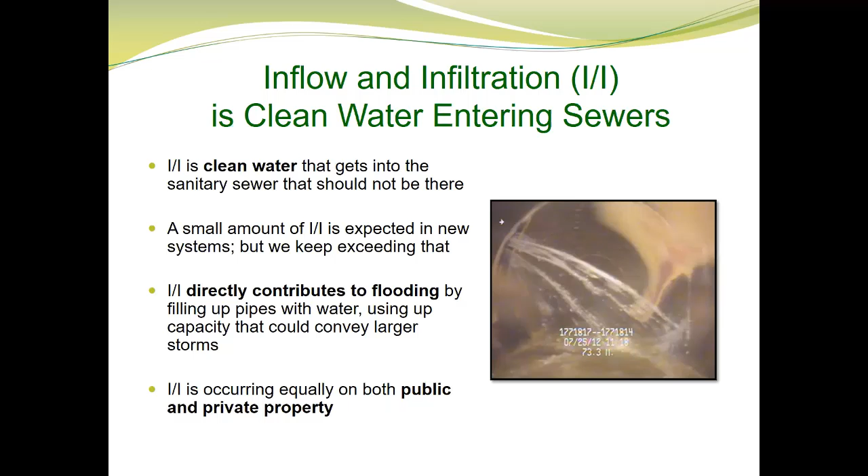And you'll hear many times during the webinar that I&I directly contributes to flooding, because the fuller the pipes are with water, the more likely additional water will cause a flooding event. Certainly, if it's a minor flooding event, it may be prevented by getting some of this clean water out or not allowing it to enter the sewers in the first place.

So we are doing a lot. ICLR and I are doing a lot. They're doing a lot more, but there's a lot of research that we're doing here. I'm not going to read these, but these are some of the things we're working on. I'm going to highlight the projects in red because we only have an hour, and I want to focus on things that you might be interested in. I'll mention the other ones, and certainly you can ask more questions. But yeah, there's a lot going on, and we're making lots of great progress.

So firstly, just to set the stage, no matter whether I'm talking about the public side or the private side, I'm just going to remind you what this looks like. So the public side of a sanitary sewer system is the street and the right-of-way. If you can see on this graphic, it's on the left. And it includes the main sewer that's typically underneath the middle of the roadway, and what we call the lateral or the sewer to the property line.

And then on the other side of the property line is another sewer lateral. It has a different name in the building code, but let's call it a sewer, and it goes to the house. This graphic is a little bit misleading because the sewer on the private side is actually made of different material than the one on the public side. It's much less, it's thinner walled. It's not as strong, and it doesn't last as long as the sewers we establish on the public side.

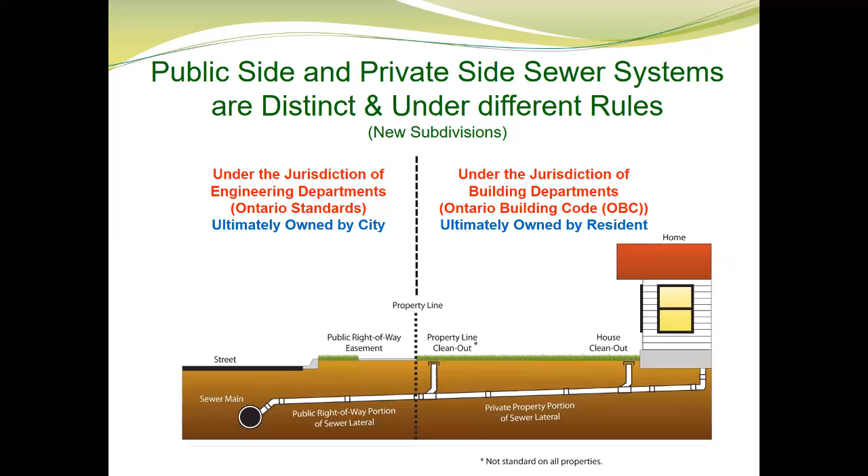And in engineering, as Dan said, I've been doing this for decades, thanks Dan. In engineering, we have mostly focused on the public side and not so much on the private side, but that's changing now because we're recognizing that the private side is a big contributor to clean water in sewer systems.

So, first project. I've been working on this, we discovered this issue in Woolwich Township like 13 years ago. In my career, I've been working in I&I my whole career, and we never thought that, we always assumed that brand new subdivisions would be not leaking at all. Like the flows would be very low and they would never be leaking, and we never flow monitored them.

But just accidentally in St. Jacobs, and this is public, so I'll use their name, I had a flow monitor downstream of a new subdivision, and after it came online, the flows in that flow monitor doubled, and the size of the subdivision did not warrant that much of an increase in flow. So we investigated, and we found a series of deficiencies in the subdivision. The contractor corrected them, and that was fine.

But subsequent to that, largely because Woolwich has had serious I&I problems at their wastewater treatment plants for years, I&I is a real problem for them. They decided to flow monitor all new subdivisions, and after that we flow monitored 3 more, and all 3 of those new subdivisions were also leaking. And they're all leaking for different reasons and in different ways, but they're leaking.

And by leaking, I mean there's more clean water getting into them than is reasonable to expect from a new sanitary sewer system. So when I started my company, Norton, 2.5 years ago, the first thing I thought was, you know what, I bet you if this is happening in Woolwich, it's happening across Ontario.

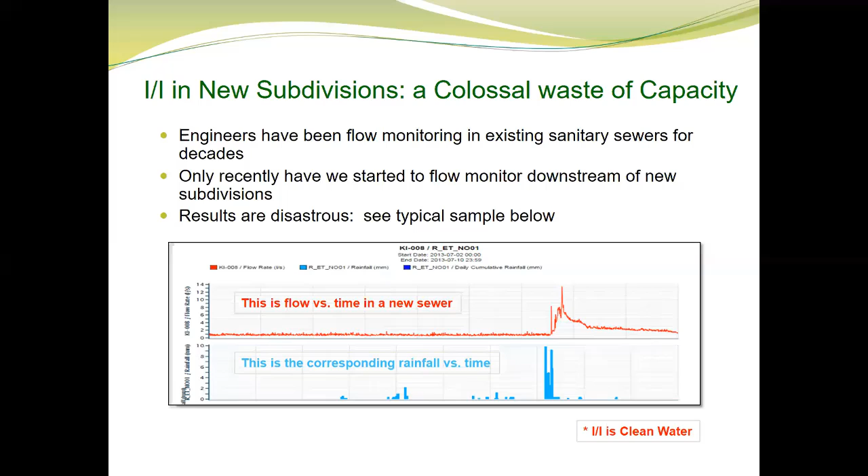And this base flow and that peak - the sewer was just built and it has a 75-year life. Those are going to be getting into the sewer for the next 75 years. And this is something we just can't afford to keep allowing.

So the first part of the project that I started with Norton Engineering was to actually just survey across Ontario: have you flow monitored any new subdivisions, and what have you found? It's not common to flow monitor new subdivisions, because I presume everybody else like me assumed that new subdivisions were not leaking, and we never really looked at them.

So I had 31 municipalities send me their data. The data is all blind, so I'm never sharing which municipalities said what or where or anything like that. And 94% of them self-reported that the new subdivision was leaking. So basically, almost all the subdivisions were reported as leaking, and that's as defined by the municipality, and I've done a lot of calculations on what the appropriate number is.

But anyway, let's just suffice to say, if you looked at the graphs, you'd see the kind of thing I see here, and even if you're not an engineer, you can tell that there's something wrong with the flows in that pipe. One municipality has advised that their new subdivision is not leaking, but I haven't received the data from them, so I can't really include it as not leaking unless I have the data. And I suspect they're using a different criteria for leaking than I am.

But anyway, so that's fine. There's some doubt about that one. And there's one single subdivision in the whole data set that's not leaking, and that happens to be in Woolwich. The reason that subdivision is not leaking is because developers working in Woolwich are now well aware that I flow monitor downstream of all the subdivisions, and a number of them have had letters of credit or money held back when we found the sewers leaking, and they know that that's going to happen again.

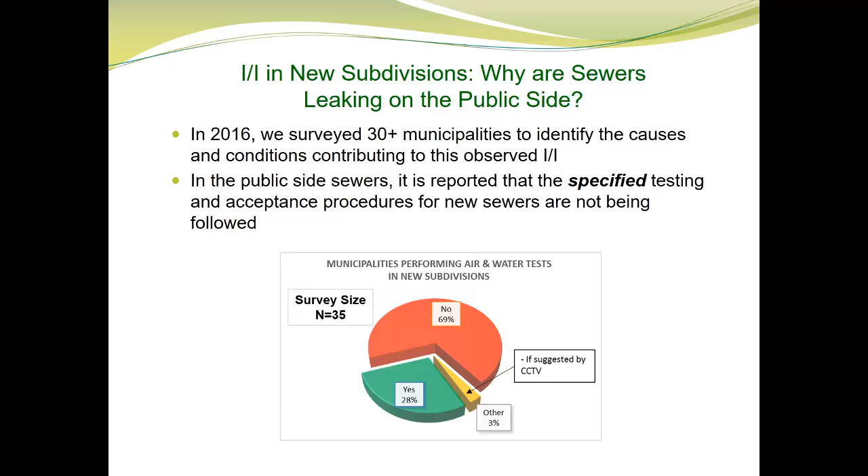Another issue that's quite common: those specifications we work under on the public side call for checking the gasket between pipes. When we lay pipes, whether concrete or PVC, you can imagine if we just shove those two pieces together there would be leakage there. So there's a gasket, like a rubber ring, between the sections, installed at each joint in the sewer.

It's a leaking joint. The specifications we work under actually call for each and every gasket to be checked once they lay the pipe, and that's not happening at all. I didn't hear any municipality tell me they were checking gaskets, or having the contractor check gaskets at each joint.

There's a practicality to that, because of how they lay pipes—they've got one pipe section laid in the trench, and typically these pipes are heavy, so an excavator or whatever puts chains on another piece of pipe and lowers it into the hole. Staff or contractors standing down there jimmy the new piece of pipe into the old one. Now they put the gasket around it. I've never seen them not put the gasket on, but it's a pretty delicate operation to get that new piece of pipe on without displacing the gasket.

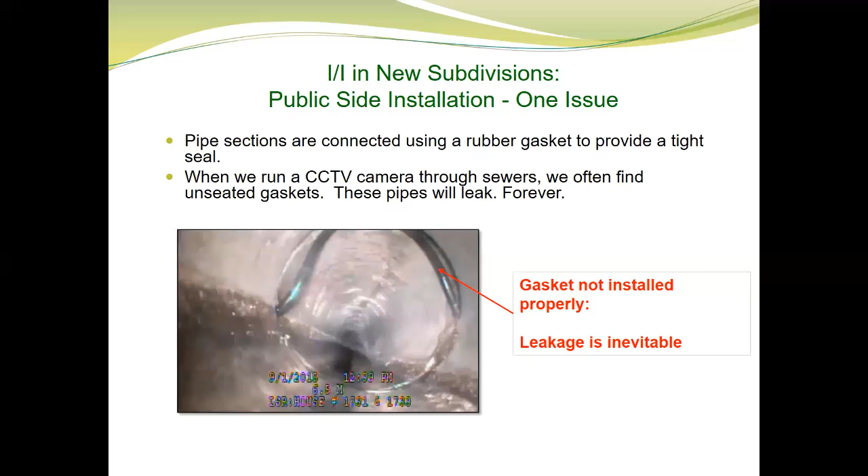However, this pipe is going to leak in perpetuity. And yeah, we found that a lot.

Okay, so moving over to the private side. The regime under which they work is slightly different—they work under the Ontario Building Code, and the requirements of the Ontario Building Code are regulation, as opposed to the guideline specification we work with on the public side. So it's actually more essential that these regulations are followed because it's law.

So I found similar results on the private side—we're all complicit in these issues. On the private side, they're also supposed to test the sewer from the house to the property line to make sure it's not leaking. 90% of building departments I spoke to advised that they were not testing the private side lateral. If we're not testing it, and leakage is happening, we'll never know. We could find out if we camera the lateral, but we typically don't unless there's a problem, and these laterals will leak forever.

So another issue on the private side: a pipe here is typically plastic, the stuff you see here. It's thin-walled, nowhere near as strong as the pipe on the public side. The joints are glued together as opposed to gasketed. With a gasketed joint, the rubber thing I showed you, there's a little bit of room for play—not a lot, but one pipe or the other could move a little bit.

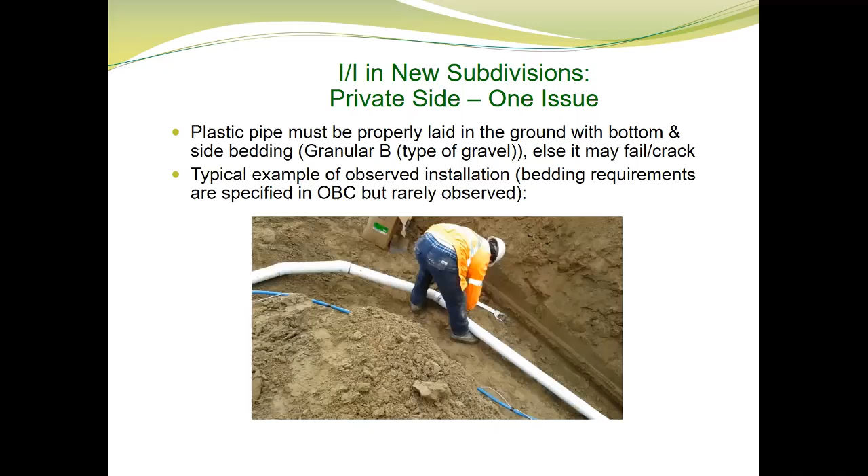And for the insurance folks, I'm sure you can imagine if there's more water in the lateral, the chances of flooding are going to be higher. And again, this is for life, because this is a brand new sewer.

The last thing I'll talk about, I've just picked out a few examples. We need to install, it's required, the engineering specifications require that we install a T at property line. The reason for that is for the building department to actually inspect the private side lateral, they need a way to plug it at the property line. So they can put in a temporary test T or whatever, and I suppose that will work as well, but we're actually required to put in a T. And to my knowledge, most municipalities in Ontario are not putting in T's anymore, even though it's called for in the specifications that they use for these projects.

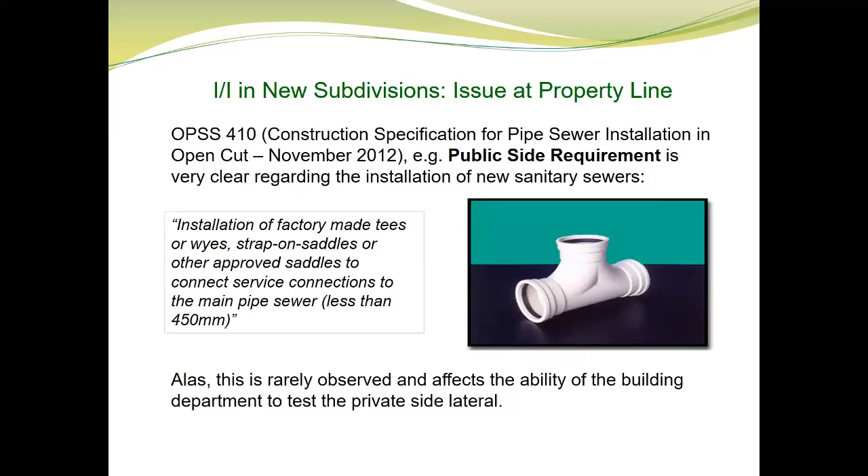Connection at property line - I mentioned that this is a place where we often see inflow and infiltration, and that's because, as I said, we dig it up and then we have to recompact. But when you compact differently on two sides of a connection, there's great opportunity for differential settlement. That leak you see there is in a brand new sewer at property line, and you can tell it's property line because the mainline pipe is green, and then you can see it's black - the black is the private side lateral. That leak is what we call a gusher, meaning there's some pressure behind it. If it was a seeper, it would sort of roll down the side of the pipe.

Based on my experience, that's probably half a liter a second. And if you remember what I said about 1 liter a second over 40 years having a present value of $1 million - if you can imagine these kind of gushers and weepers going on all over new subdivisions, that's a heck of a lot of money just in treatment. And I'm not even including the flooding made worse because of all this additional water in the sewers.

The vast majority of municipalities are not requiring CCTV inspection of laterals. That's what this is, but I think we really need to start doing that. A couple of municipalities in Ontario are actually now CCTVing the lateral from the house, which means they can go from the house all the way to the property line and then all the way to the mainline sewer, which is great. It's great to see a few start that, but I think that needs to become very common in our industry.

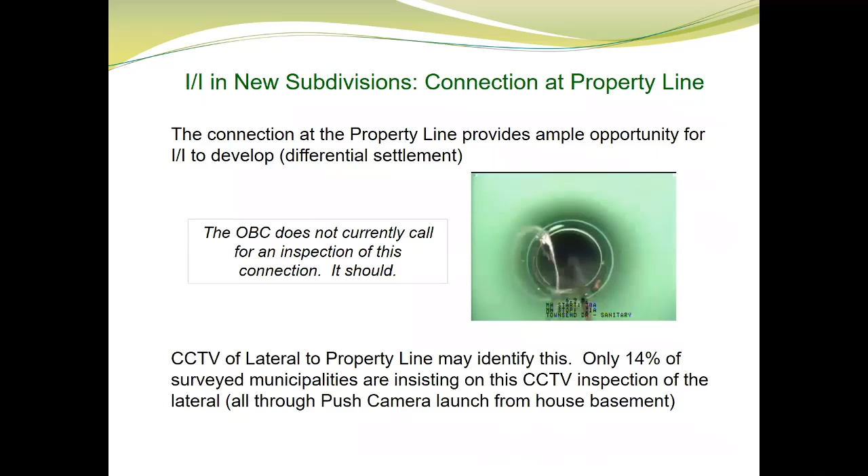So we found about 100 different issues that are all contributing to this I&I in new subdivisions. And I've talked a lot about testing and all that because that's pretty cut and dried, but there are a lot of other things going on.

The regulatory regime is a problem, along with coordination between departments and pressure from developers to get things built and approved. I understand that, they're trying to get their houses built so they can get their money back. But if they're doing it at the cost of building good infrastructure, then as a municipality, we're losing a lot by allowing that.

Something else very important you may not be aware of is that in the engineering industry, largely cities are awarding projects based on price, not qualification. Often they have prices 10% or 20% apart, but that means when consultants bid jobs to work on the public side, we have to price them as low as possible to win the job, and you get what you pay for. So if a job is priced very low, inspection sometimes, even though it's mandated, corners get cut, and this is a problem in the engineering industry. It's being dealt with by others, so I'm not taking that one on, but it is affecting how well the work's getting done.

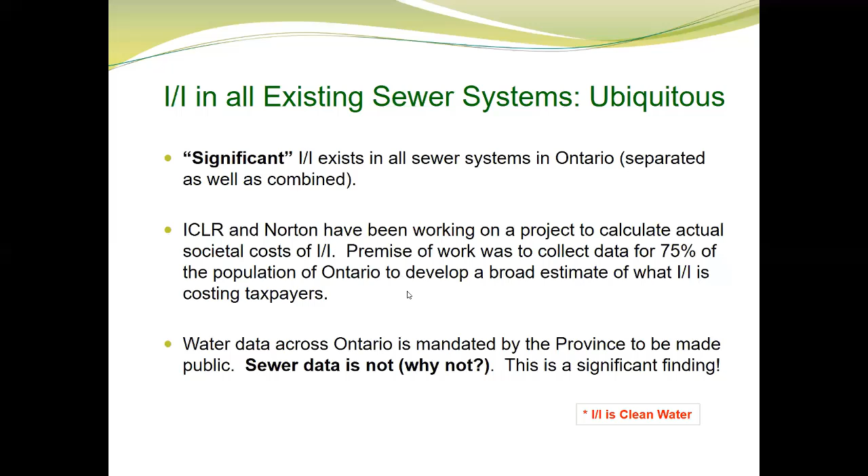The present value of a liter a second is $1 million at $1.50 per meter cubed, which is a very low estimate because there's more than just treatment involved, and a 3% discount rate. So we need to keep remembering that when we're deciding how much money to spend on inspection and legislation.

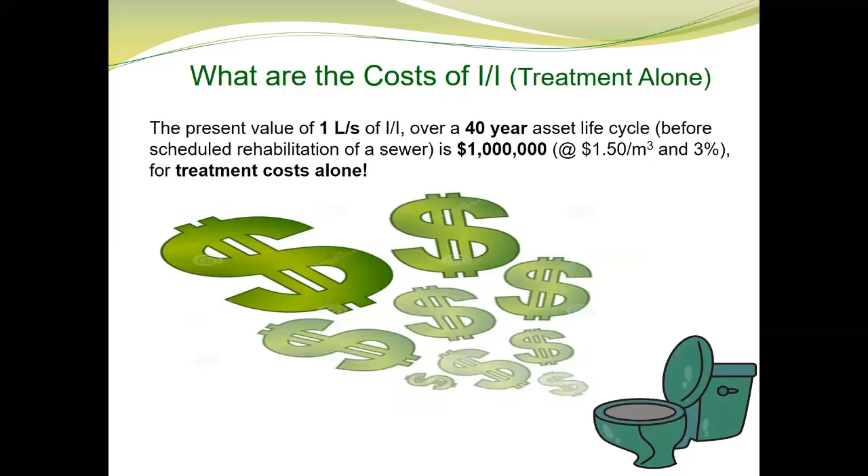For the insurance folks, I'm going to state categorically that there's a direct relationship between I&I and flooding. The more water there is in the sewer before a flooding event happens, the more flooding we're going to get. That's it, there's no other way to put it. One of the problems with I&I, even in a non-catastrophic event—not necessarily a Windsor where we had inundation flooding recently, but just routine, there's a big rainfall and some houses flood—if we had this clean water, or a lot of this clean water, out of the sewers, those homes wouldn't have flooded. So every drop of water that gets into a sewer system is going to be contributing to flooding. In engineering, we build models and do all kinds of technical analyses, but I don't think we could ever actually quantitatively predict this relationship numerically, but I'm just going to speak categorically that it exists.

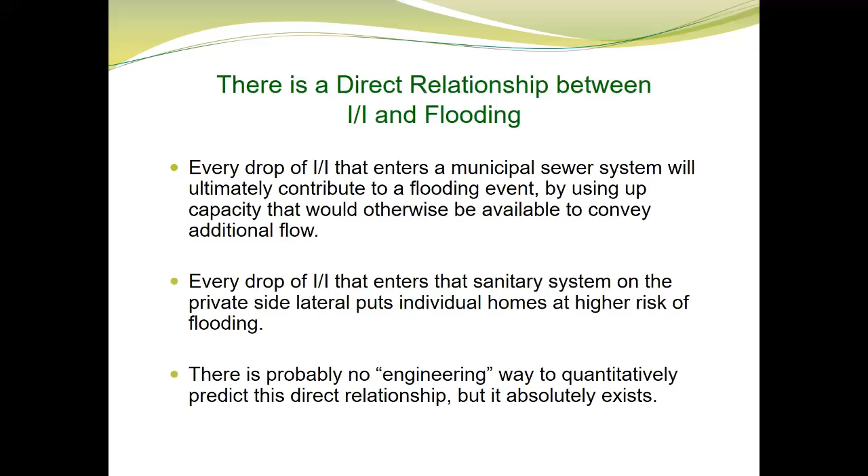But the municipalities I showed you had 40% of the flow in the sewer was clean water. So if you imagine taking that clean water out, that leaves a lot of room in that sewer to allow new development, which everybody in the province wants. Like I just said, it would provide capacity to reduce routine flooding. And then climate change is upon us—I don't think anybody's going to argue that anymore. So if we had 20% more room in our sewers to convey events associated with climate change, we'd have a lot less flooding.

So we have a lot of work to do here.

So the next project we're working on with ICLR—and this is one of the most interesting things we're doing—unfortunately I don't have a lot to report yet because we're having a few legal issues with it, but that's okay, we'll get there.

So insurers, I know the large insurers have detailed models to predict risk, and the smaller insurers perhaps less detail. Certainly insurers often look at: if you flooded before, you're at risk of flooding, which is a pretty decent measure, I would say, but it's not the only measure to look at. But that's the best information they've got. Now engineering departments in cities know tons about their sanitary sewer systems. Many of them have dynamic models of their sewer system. They can predict flooding, they can run 100-year storms through their models to see where flooding would occur. They've got data from the guys that work in the field. They have tons of data about their sewer system and how it might respond to larger events.

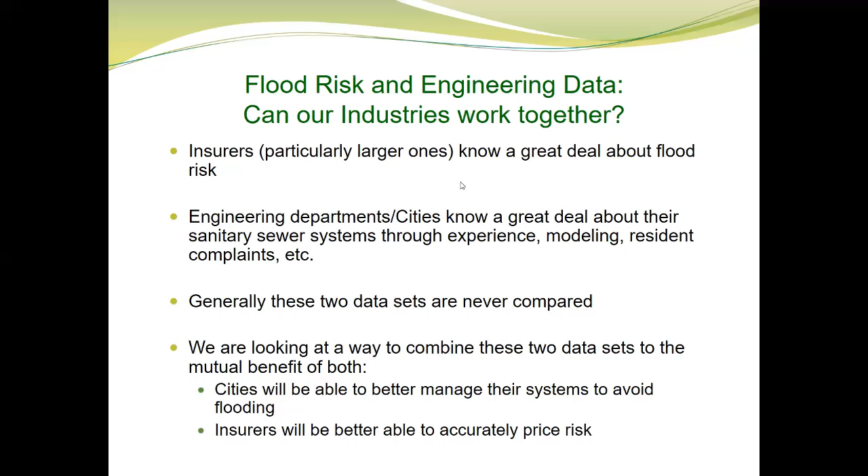I've signed some non-disclosure agreements and I'm working with some municipalities to get data from them, and I look forward to having a lot more to report on this. The results will be confidential in the sense that I won't be disclosing which insurers and which cities, but I think we may be able to come up with some ways that we could share data a little bit better than we are now.

I'm not going to go through this slide in detail. This is just some of the ways that water can get into sanitary sewers. I imagine you guys have seen this slide before, but I just dropped it into the slide deck in case you have questions later on, so I can refer to this picture. There are lots and lots of mechanisms, but these are some of the common ones, occurring on both the public side and private side.

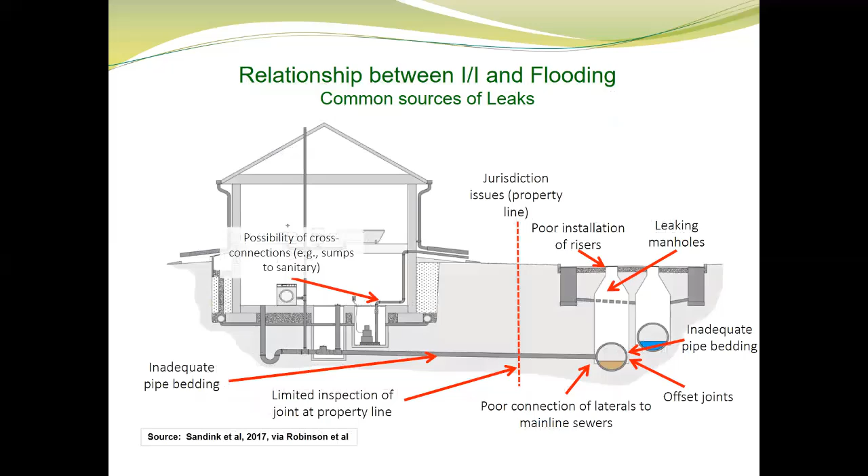So I've been talking about the costs of I&I in sanitary sewers, and I'll just give you an example of a calculation I did for Hamilton in 2014.

First of all, it's illegal now in Ontario to have roof leaders connected to the sanitary system. Roof leaders: rain falls on the roof, it goes down the downspout, and then typically, ideally, there's an elbow and an extension. You guys probably all have that at your homes, and the rainwater is discharged to the grass or whatever. There are some places where the plots are so small that that's problematic, but generally speaking, that's what we like to see.

This project, we looked at known roof leaders that were connected to the sanitary sewer. How we can find that out in engineering is we do something called smoke testing, and it doesn't matter what it is, but anyway, we can positively identify when a roof leader is connected to the sanitary sewer system.

So we knew about 773 roof leaders that were connected. Most of them were up on the mountain, so they were discharging into a separated sewer system, which means the sanitary just takes sanitary, and there's a storm sewer for storm. But these roof leaders were going into the sanitary sewer system, which is something we don't typically do.

So we looked at all the costs of those connected roof leaders. In this particular case, all that flow comes down the mountain and actually connects into the combined sewer system, which is by the harbor and goes to the wastewater treatment plant. So any drop of water getting into the sewer on the mountain is actually discharged if it ends up in the combined system. And as you know, Hamilton has an awful lot of flooding, and inquiring minds want to know how much flooding we could reduce if we got some of these ridiculous roof leaders out of the sanitary sewer system.

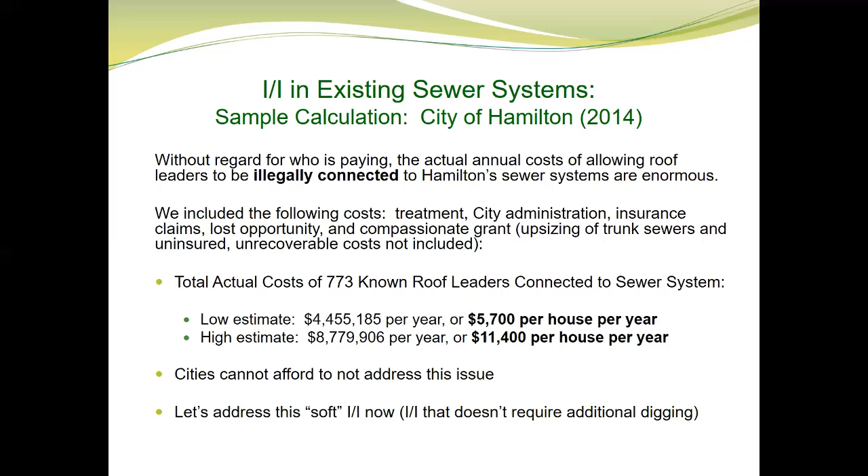Okay, next project we're working on is how the Ontario Building Code provisions are contributing to I&I, and the National Building Code as well. I'm currently more familiar with the Ontario Building Code, but we'll extend it to the national as well. The Ontario Building Code is an extremely complex document. My goodness, Dan and I took a one-week course on just house plumbing in the spring, and there's appendices and supplementals, and about 6 places where you have to look to find all the information you need for one particular thing. So it's not an easy document to understand.

But there are lots of places in the building code where some of the provisions are not preventative of I&I. And as I'll speak to later, most building departments aren't familiar with I&I, clean water and sewer systems, because that's not what they work in. Engineering departments work in that. So there may be things happening on the private side that the building code is allowing that is probably not helping our cause.

I won't go through all this, but I'll give you a couple of examples. It's contradictory in places, but I'll just reference the code numbers. Code 7453 refers to the fact that a foundation drain may connect to a sanitary drainage system. Now, in engineering, this is anathema. That foundation drain going into the sanitary sewer - we don't allow it, we don't want it.

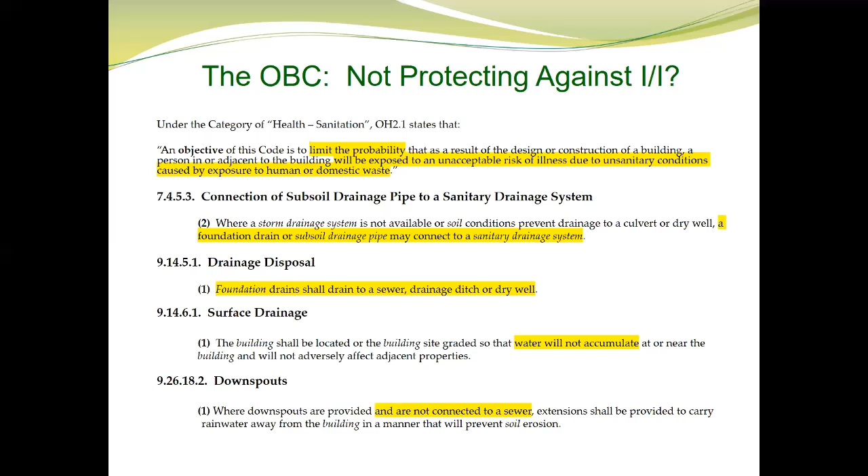Okay, so the next item that ICLR and I are both working on - you probably aren't aware of this yet - but CSA has decided to develop a new guideline for basement flood protection. And insurers will be very happy to hear this, because this is going to lay out all the requirements to make sure, or help ensure, basement flooding doesn't happen. We'll never be able to - I can't say that as an engineer - but to mitigate or minimize basement flooding.

So that just started this year. It's funded by NRC, and it's a climate change adaptation initiative. So we're looking at the mandatory implementation of protective plumbing equipment, by which we mean things like backflow preventer valves, backups on sump pumps, lot drainage - all that kind of thing is being looked at in this CSA guideline, which will be a standard. And once it's a standard, it'll be picked up by the various building codes, hopefully the OBC. So it'll say right in the OBC, thou shalt conform to CSA XXX. And so these things will become law in Ontario.

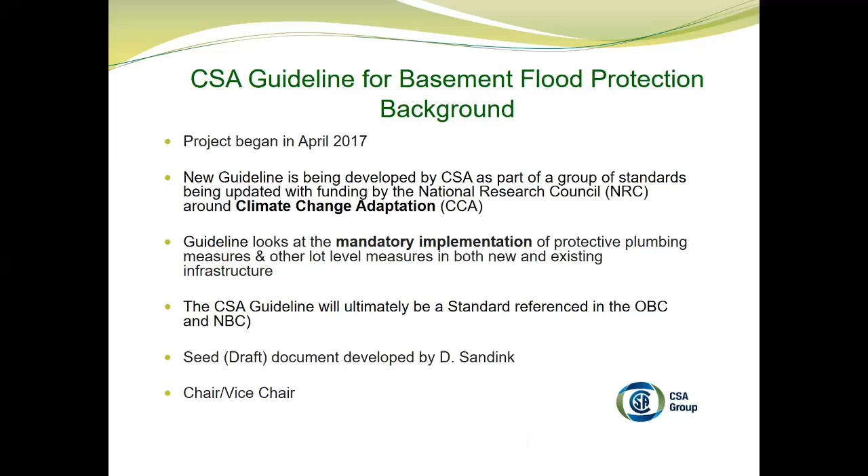I'd like to thank Dan for developing the seed document. He basically wrote a draft of the entire document himself, and it was a fabulous draft because he knows a lot about this stuff. And then the committee, of course, is going through it line by line - there's about 20 of us working on it - and it will be put out for public consultation in January, I think, or possibly February. So we'll get public comment on that and refine it. I happen to be the chair of that committee, and Dan is the vice chair, so we're working closely on that. This is going to be a very helpful thing for insurers.

And these are just some of the graphics that are in that guideline. Dan came up with these or adapted them from other ICLR documents. I'm not going to go through these in detail, but they just show the various mechanisms by which flooding can occur in homes. You're welcome to look at that in more detail later if you have questions. Dan or I could certainly help you.

Major household flood causes, as you know, are sump pump failure, power failure, failure of building sewers, meaning the lateral on the private side can collapse, etc. There are lots of ways. Back-graded lot grading as well, where the lot is graded towards the house, water flows towards the house, and then it has an opportunity to get into the lateral or the foundation drain, or indeed into the house through cracks or window wells.

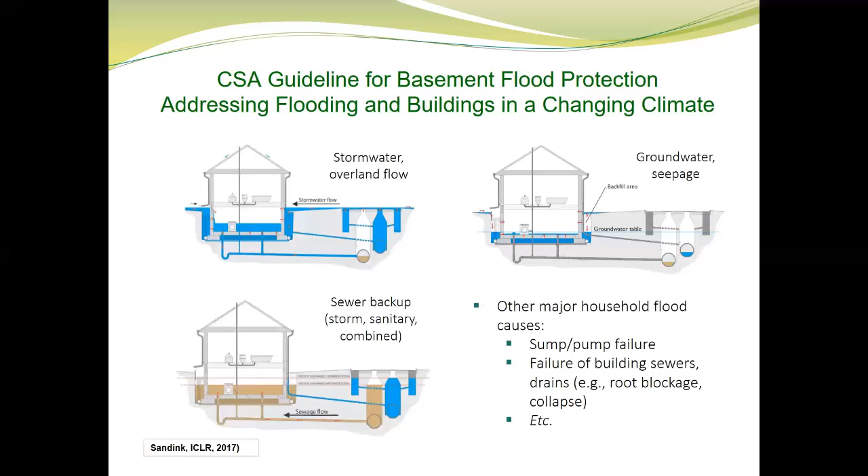And I already mentioned that laterals have a much shorter service life than sanitary sewers. I would guess that to be about 30 years. So we really need to start messaging that the lateral is something you own and you need to maintain, like your roof or your furnace. So I think this kind of thing is going to be very valuable in the CSA guidelines.

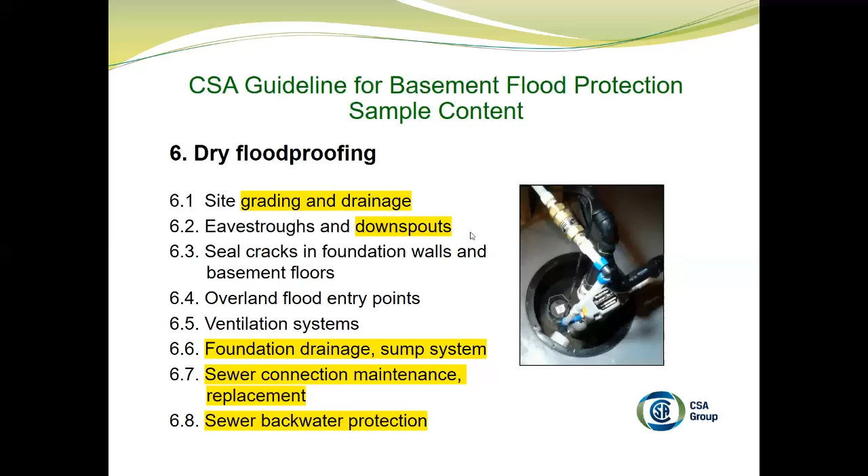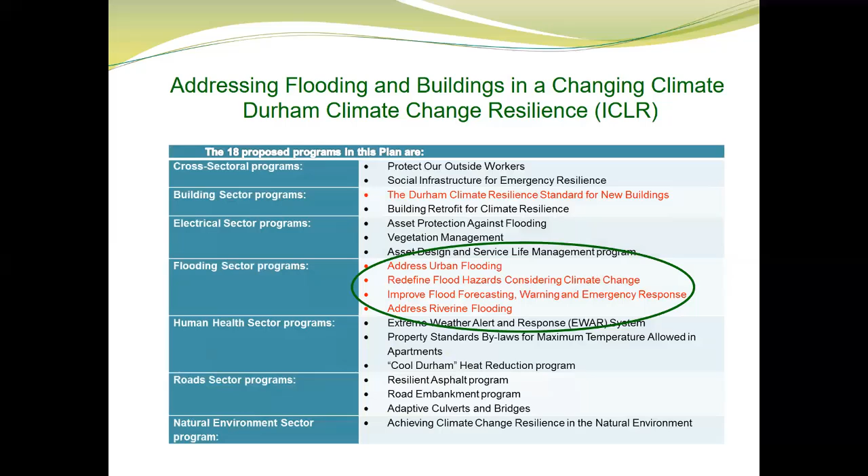And then I think the last thing I'm going to mention is ICLR is working with the Region of Durham to develop a climate change resilience document, a standard I guess, which includes some of the things I've been talking about, like urban flooding. They're also writing up a guideline for a standard for how new buildings should be constructed. So I wouldn't be surprised to see this kind of thing also be developed in lots of municipalities across Ontario, because we need to start doing something, and we need to start doing a lot of things, and we need to start doing them fast.

So in conclusion, inflow and infiltration is clean water getting into sanitary sewers. It's not going away. It directly contributes to flooding. It occurs both on the public and private side of the sewer. And municipalities, insurers, and the public will all benefit from removing or preventing, which is actually cheaper and easier, the I&I.

So ICLR, like I said, they're coming at it from a whole bunch of different directions, because I think that's what we need to do. We need to start being creative. I've been a civil engineer for 27 years, and honestly, the way we lay pipe has never changed. We're doing it the same way. It's probably the same way the Romans did. And that's great, but we need to get more creative, so we get better results.

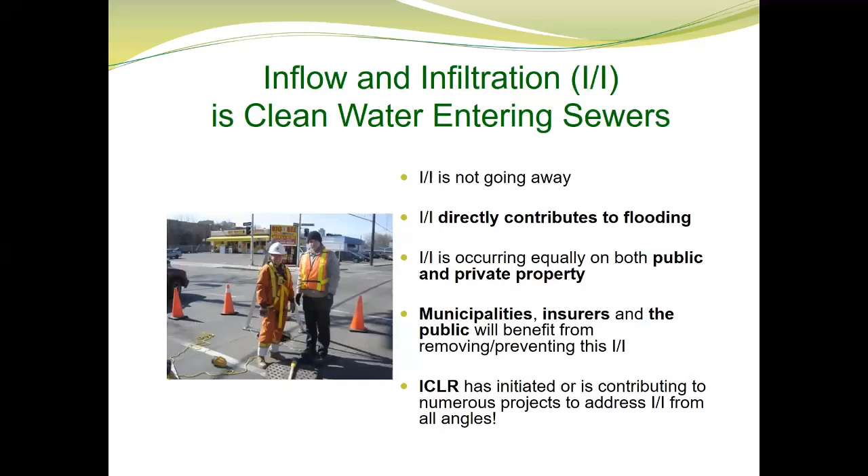Well, thank you so much. That's a sewer in Passau. All roads lead to the sanitary sewer in my mind. Great, thanks very much, Barbara. Sorry, what's this picture we're looking at again? It's in Passau, Germany. Germany? No, Passau. Anyway, yeah, Passau, Germany. That's right. Yeah, okay, thanks again.

Very interesting, informative presentation. We have lots of questions here from our online participants that I'll start going through now. So first question from Paul Kovacs: I didn't see mention of the design standard in your presentation, but we've heard it several times from you. How much I&I is acceptable in a new system, and how much would be considered acceptable over the life of a system?

Okay, great question. I do have lots of slides on that, but it's a little bit complicated. What I can tell you is there's two places in the engineering documents, guidelines, standards where allowable I&I is identified.

One is in the leak testing of sanitary sewers that's done when the public system is established, and that is 0.01 liters per second per hectare. That probably doesn't mean anything to you. The acceptance testing number, or the long-term allowable I&I number, is 0.1 to 0.28 liters per second per hectare - 10 times the leak testing number. So at leak testing, we should be allowing between 4 and 10% of the allowable long-term I&I.

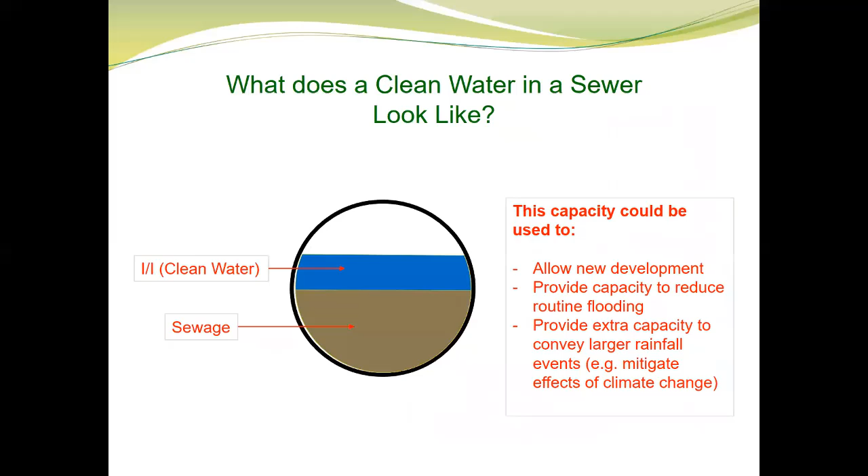A question related to the cost of treating water, from somebody who works in a municipality, regarding the City A and City B graphs with billed versus treated water. How is the volume of wastewater billed determined when calculating treatment costs associated with I&I? We bill based on water consumption, so it would be difficult to determine an actual volume of wastewater. I'm using two different measures: for billed water I look at billings from the municipality, and for wastewater influent I look at the meter at the influent of the wastewater treatment plant. So it's different — I'm not using billed wastewater, I'm using billed water and the influent flow meter at the plant.

Another question: there's a fair bit of focus on new subdivisions and I&I rates there, and whether that's an indicator or important factor in considering flood risk. Rob, from a municipality in the GTA, states that even exceeding 0.28 liters per second per hectare by 2 times will not cause flooding in a new subdivision — there are good examples based on recent extreme storms and flow monitoring, with challenges being in the older systems. Could you comment on the importance of considering I&I in new subdivisions from an urban flood perspective?

Absolutely, very good question. Generally speaking, I&I in new subdivisions is not going to cause flooding in the new subdivision itself. Firstly, the minimum pipe size in new subdivisions is 200 millimeter diameter, and the flow coming in on the upstream legs is very low — I go in those sewers all the time and it's just a trickle at the bottom of the pipe. So lots of I&I there wouldn't necessarily cause a problem in the new subdivision. The problem is the flow from the new subdivision flows downstream into the older part of town — not always, it depends on the sewer configuration, but it has to flow downstream. You don't typically have a pipe from the new subdivision straight to the sewage treatment plant. So it's contributing to flooding elsewhere in the municipality.

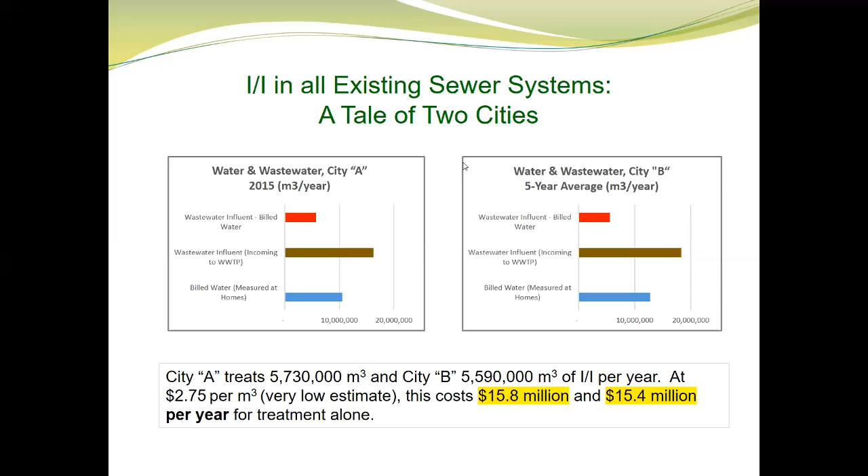One last question is related to the slide you just moved away from: the $15 million to treat that I&I water, what proportion of the overall treatment cost does that figure represent for those cities? In one city, there's a regional municipality which charges them for sewage treatment, that was the 275 number, and they pay the same rate for treatment for the first cubic meter and the last cubic meter, so it's not a step-down rate with flow. But that's treatment, directly what the municipality pays the upper tier municipality to treat their wastewater. That doesn't include any of the other costs I've mentioned in the presentation.

Regarding sewer laterals, let me tell you about my own. My house is 75 years old now, so it would have been 70 at the time. It blocked a few times, nothing serious, so I had the city come out and they rodded it. Eventually I had a basement issue, not really a flood, just seeping up a bit, but I caught it quickly. When they CCTV'd it, they found that every 20 feet, where the joints were, there was a net of roots totally blocking it, because roots find their way into the sewer lateral and block it. Even though I do this for a living, I'd never really thought about replacing my lateral, but I got it replaced and I'm fine now. It's as simple as that, the lateral just fails, and the jointing is so important, because if tree roots can get in, they will.